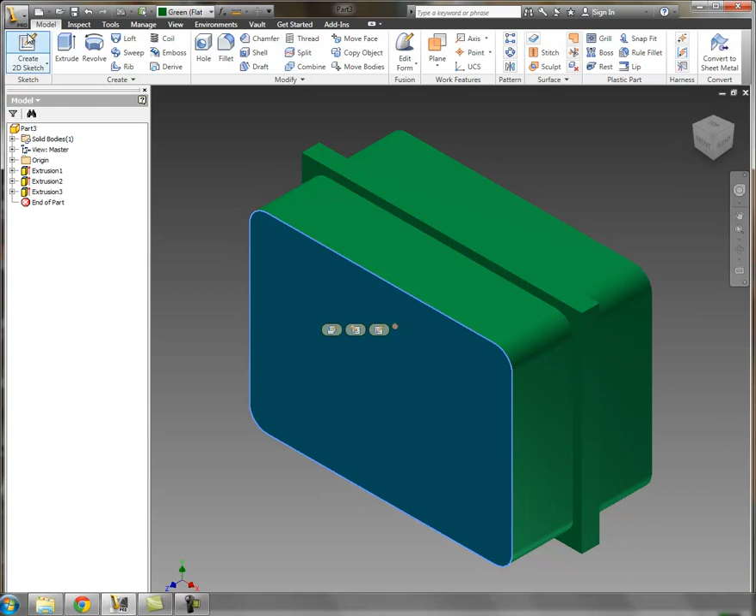Again, I'm going to use the offset command. Now I'm going to pull in from the edge that I already made in the previous screencast. So I'm going to left click, right click, dimension, and I'm going to have this little ledge that the top will sit on be 1/8 of an inch. Doesn't have to be, get creative if you want. I'm just trying to show the basic idea associated with making this box.

Okay, so I've done that, and I'm going to finish the sketch. You can see that when I pulled this in, I maintained the radius of this fillet—it kept the same distance. I can't go too far because eventually it won't be able to maintain that arc, but you might stumble upon that in your work.

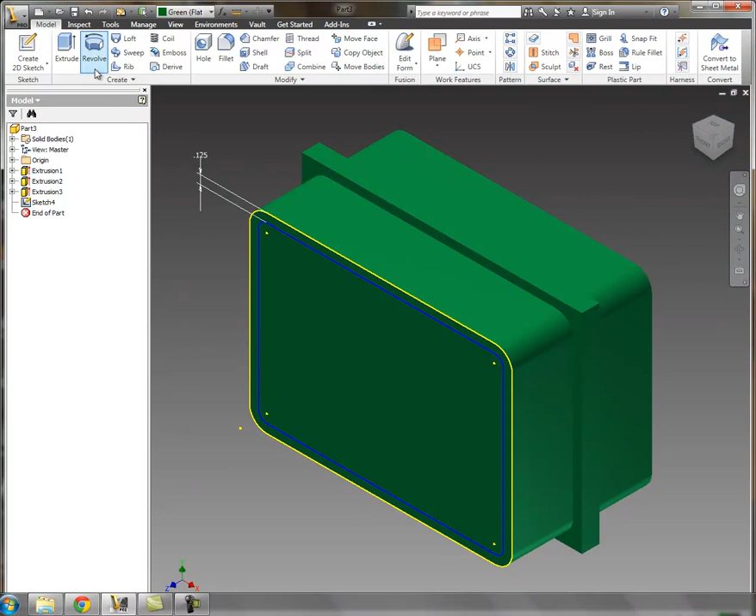At any rate, the offset command worked, so I'm going to finish here, and I'm going to extrude this region down, 1/4 inch, 0.25, and that will serve as the resting place for the top. This will be the lip, I think it's called in one of our documents.

We'll come in here, make another figure, and have the cavity inside. We'll extrude deep into this region in a moment. Okay, what we want to do now is again project this geometry to the front, because obviously our top needs to be

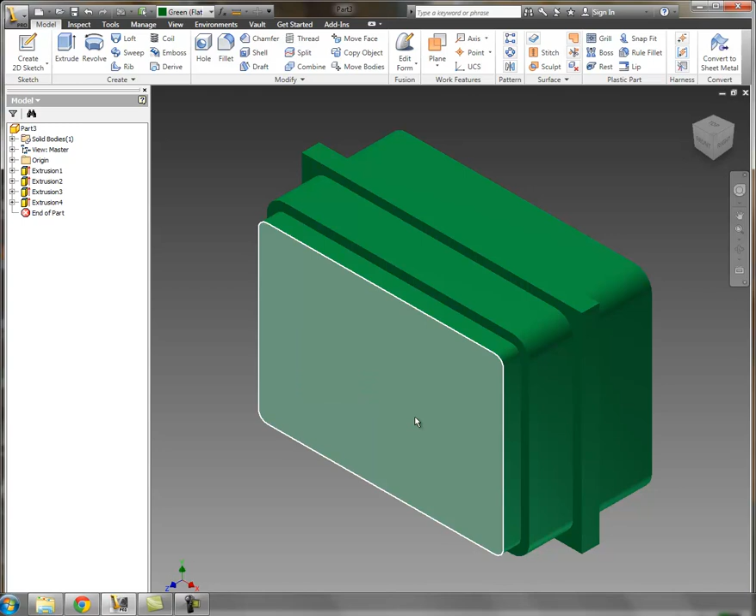very close in size to this, but not quite exactly the same. So the way I'm going to approach it is, just like before, create a sketch plane on the other side, move over, and I'm going to do one thing first—I'm going to click construction before I project this geometry, because I want to make construction features on the other side of this thing.

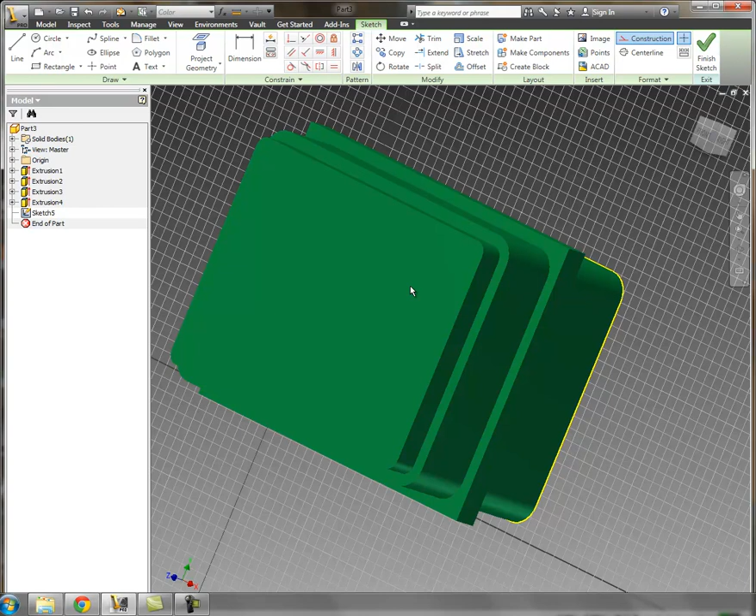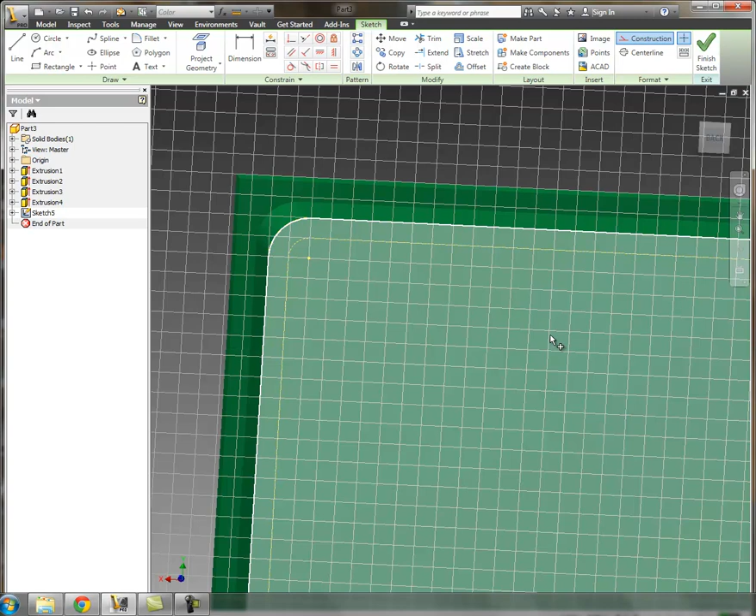So again, I'm going to project this geometry to the other side. I just clicked there, so it should have been there. And is it okay? So I do have the dotted lines of construction lines. Right click, done. That was done in terms of the rotation, the movement tool. So let's see where we're at here. Okay.

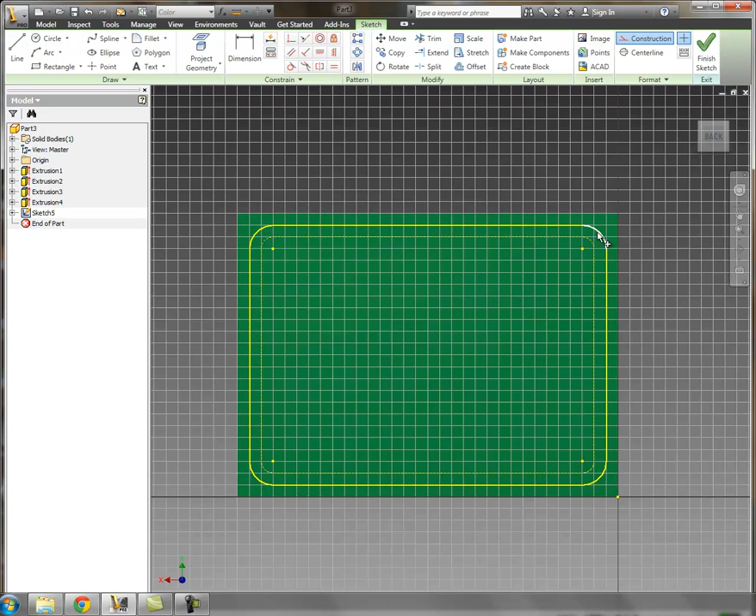So what I want to do now, I'm looking at the back of the stock, which is the top of our container. Remember, this is all gone. I'm looking right here at the so-called exclusion zone that I'm going to bandsaw, and this is the outside of my top. I'm going to take this geometry here, and I'm going to pull back from it.

2/1000ths of an inch, because I want my top to be just a wee bit bigger than that lip on the bottom. So I think that's pretty straightforward. If not, we'll talk about it quite a bit.

So I'm going to escape, deselect construction because I want to make a real line here. I'm going to come over here, grab here, pull out, left click, right click, general dimension, and then I'm going to zoom up, and between here and here I'm going to make that 2/1000ths, 0.002. And of course they're right on top of each other at this magnification.

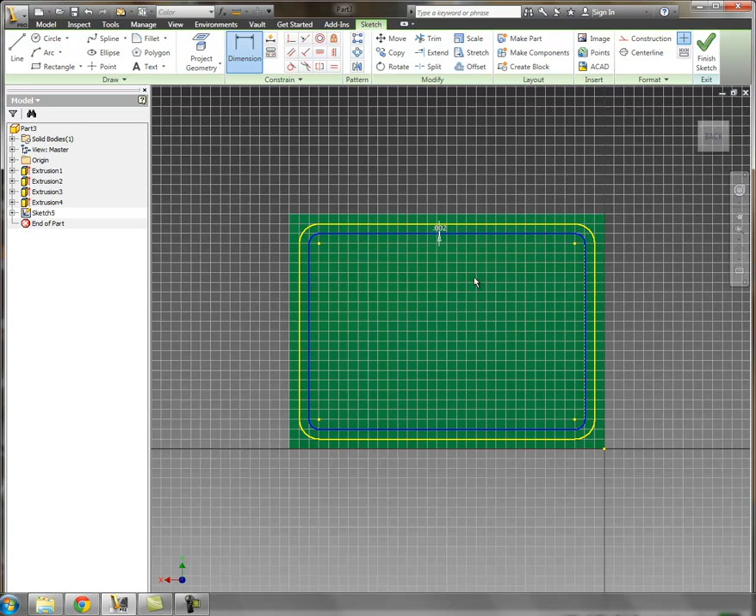And so I'm going to finish the sketch. And now I've got this geometry here in blue, just a little bit bigger than what it has to fit on top of on the bottom.

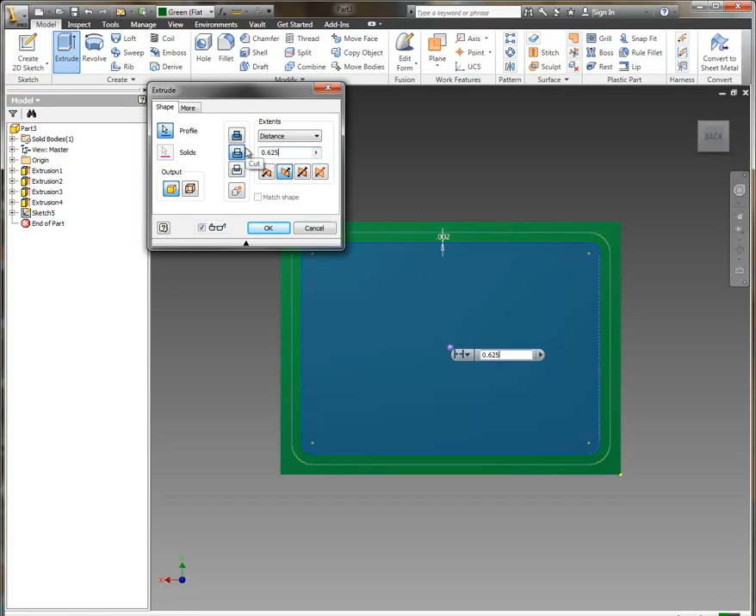So I am going to extrude this central region inward, and I'm just choosing arbitrarily 5/8 of an inch. So my top is going to have a depth, so to speak, of 5/8 of an inch. I just made that up. Yours will probably be more elaborate, but that leaves me 1/8 of an inch

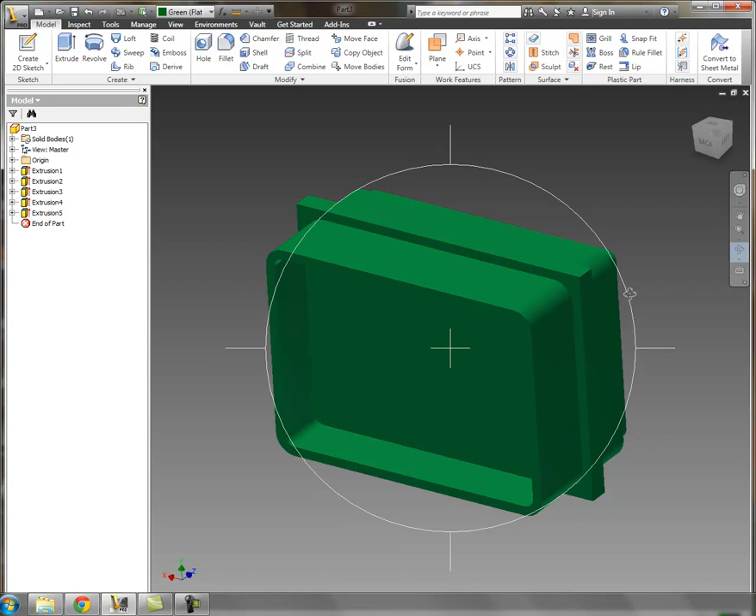between the bottom of the box and the bottom of the top and our band exclusion zone. Okay, it gets kind of tricky. Alright, so right click done, and what do I have on the other side? Okay, I've got the thing that is over which the top is going to fit. Okay, hope that makes sense.

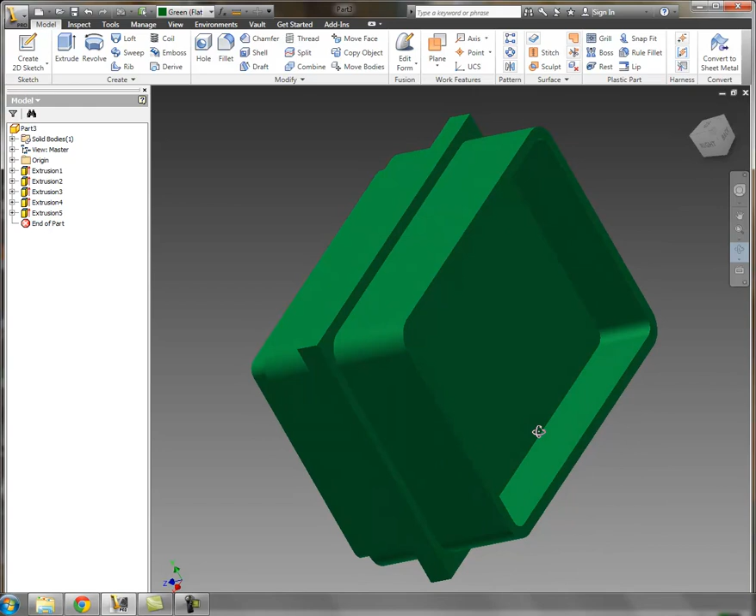And when we come back, first of all, we're essentially done with the top in this very simple box. It's just a cover that fits over this little area here on the bottom, and now we're going to extrude out a cavity here, and then we'll be done with the design of the box for the most part.